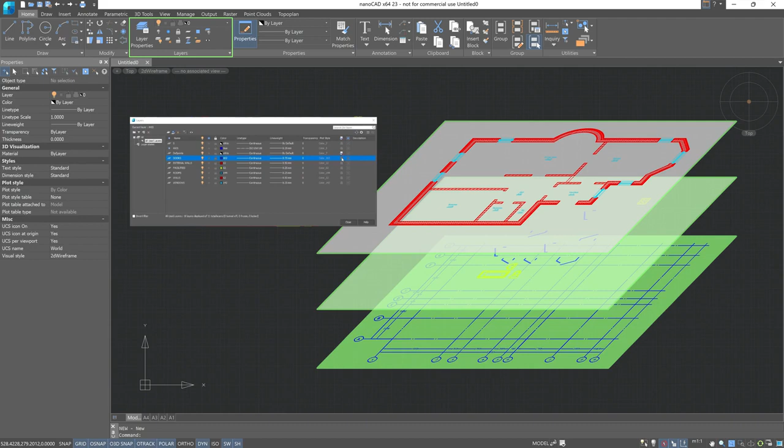Layers are intended for the logical grouping of data on a drawing, which can be displayed either separately or in combination with each other. A range of parameters can be assigned to a layer, for example, name, color, line type, weight of the lines, and so on. When selecting any element of a drawing that has a certain list of previously created layers, we can see in which layer the drawing was made, and its list of parameters.

The center lines are on the axis layer. A major advantage of working with layers is that if it's necessary to add a new axis to the volumetric plan of a typical floor, it's quite labor-intensive, and we can simplify this by hiding, for example, walls and partitions, then on the cleared drawing perform all the necessary work and afterward cancel the layer hiding command.

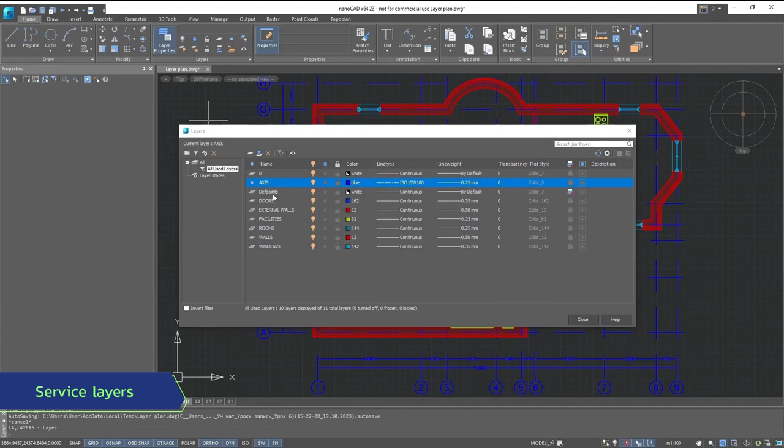Let's immediately note that layers 0 and Defpoints are service layers. These layers cannot be deleted, so they will always be displayed in the dialog box.

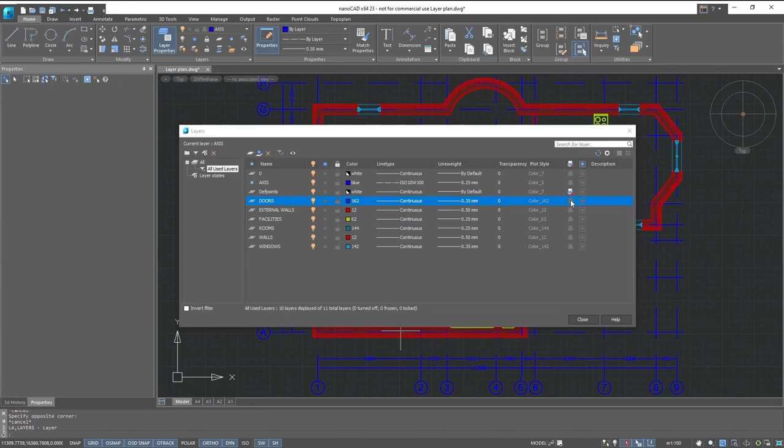All parameters of each layer are editable. We can rename the layers, turn the layer off and on, freeze, lock, change the color, line type, line weight, and also adjust transparency and decide whether this layer will be printable or not. Let's first look at all the tools that are in the layer group, without going into the layer state manager, and the first of them is turning off the layer.

This command offers to turn off the layer temporarily. Let's turn off the axis layer. We see that we've turned off this layer, and it temporarily disappeared. We can turn it back on and everything will return to its original look.

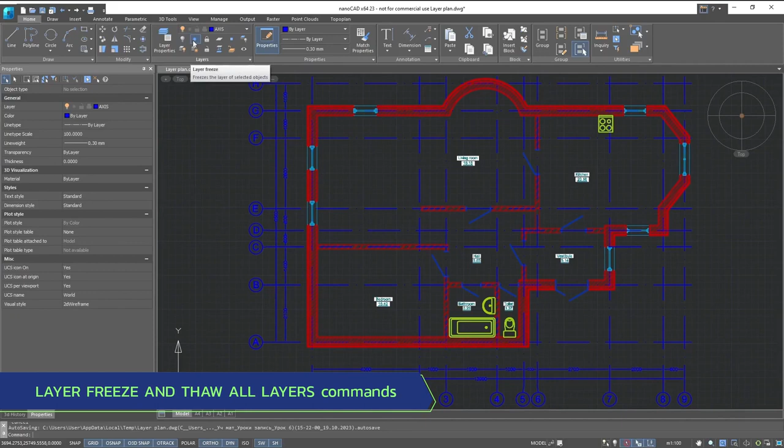The next command is freeze. This command allows you to freeze any other layers except the current one. They will stop being displayed on the drawing, but when selected they will be included in the selection area. Let's freeze the axis layer again. Under the freeze layers is a button to unfreeze the layers.

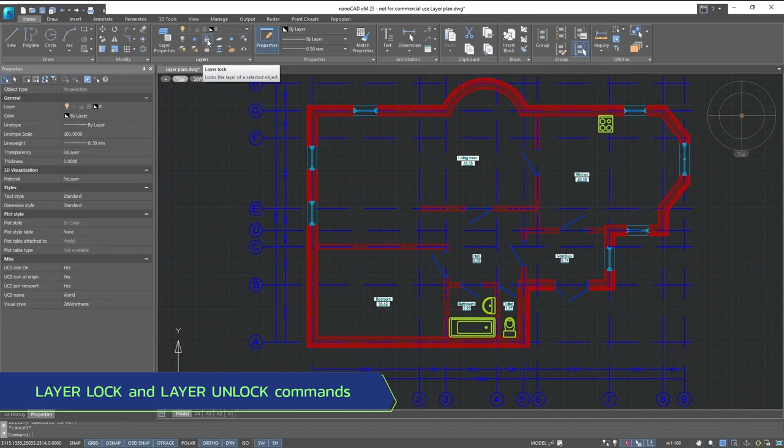Next is a layer lock command. When locked, the appearance of the object changes, but you cannot modify this object at all. For example, if there are objects that are strictly forbidden to move, such as walls or axial lines, they can be locked and they won't change their position. Lock the layer. Now we see that our axes are being selected, but we cannot perform any manipulations with them. Let's unlock this layer.

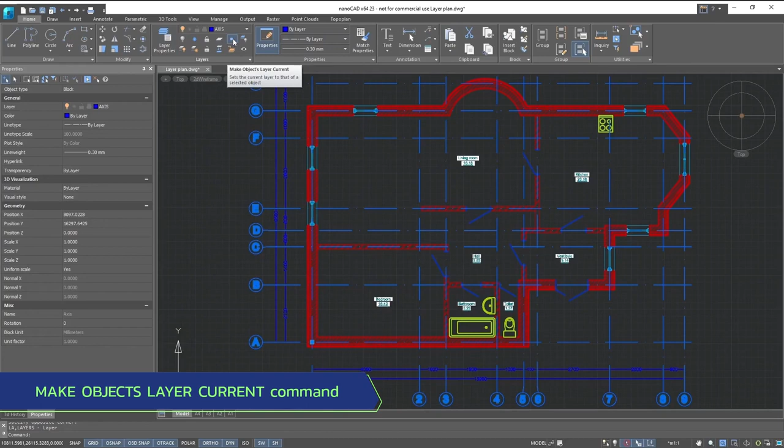The next button is for creating a layer. It is also present in the layer state manager. Later we will create a new layer. Make the layer of the object current. Now this layer axis will be the default unless we specify other parameters for it.

Next, turn on all layers that were turned off earlier. Unlock all layers. Layer matching command offers to transfer objects to another layer. You first need to select the necessary objects. Let's transfer the axis layer to the walls layer. For this, we select this command, pick the object we want to edit, and then choose the destination layer walls. In this way, we can transfer the properties from one layer to another.

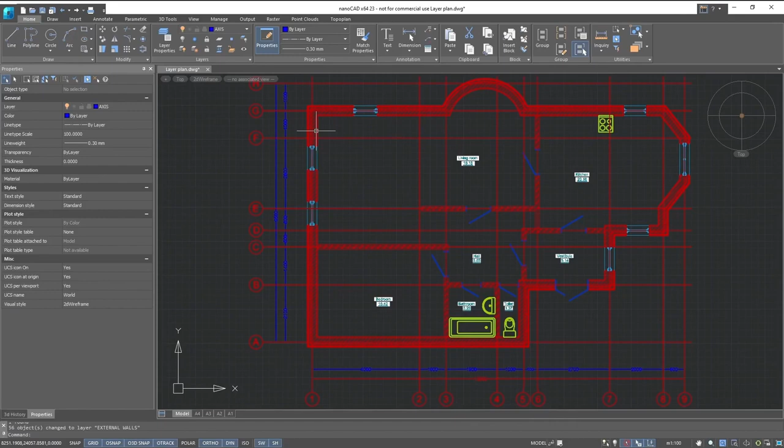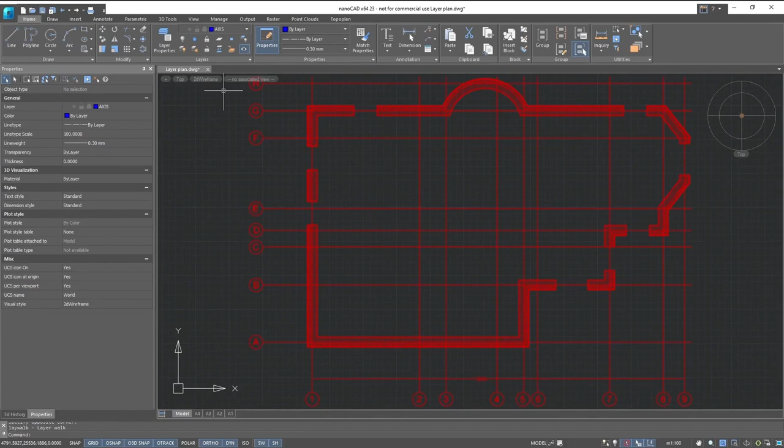The next command is previous state of layers. And the last is layer walk, which shows only the objects that were executed for layer bypass. Let's select axis again, layer walk. We see that the axes and walls remain because we transferred the axis properties to the walls layer, and all other layers stop displaying. Sequentially we can choose any layer and conduct various manipulations, and other respective drawing elements won't interfere.

Now let's move to the layer properties dialog box and figure out the next tools presented there. We can create a filter. The filter performs the following actions: it generates lists which, based on the selection criteria like color parameter or line type, should correspond to the layers that only have these parameters. Let's create a filter.

Let's name it New Filter. Now we can set the defining parameter that must be present in any of the layers. For instance, let's choose the red color. To do that, click in the area after the filter header and select red color.

Now let's finish creating the filter, and our walls layer got included in this list. To edit this filter, for instance, we want to replace red with blue. What's required for this? You need to right-click on the desired filter and click Edit Filter. Next, in the parameter selection dialog box, you need to choose the filter that sets the color, and change it to blue.

Then turn off the filter editing mode again. Now we see that instead of the red filter, we have the blue one, and all layers with this color are displayed. There is no need to create multiple filters. You can use just one, knowing that you can edit it and select the parameters you need.

The next tool is layer states. By states, we mean saving, restoring, and managing layer settings. All parameters will be automatically saved. Now let's arbitrarily set new parameters for the state.

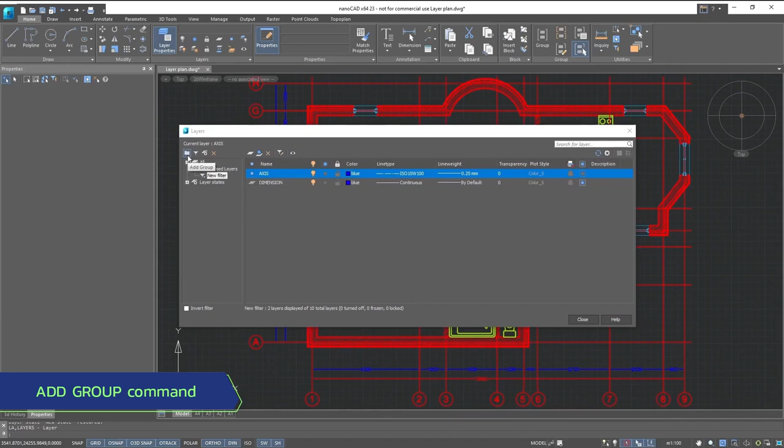Now let's try to create a layer group. This tool allows you to group layers together. For example, when you need to change settings for a large list of layers simultaneously. We'll name it Group.

In the next Group dialog window, we can add layers that we want to see only in this group, using the plus sign in the first column of parameters. Next, close the window. Afterward, in the same drop-down menu, we can automatically turn off all the layers that were added to our group.

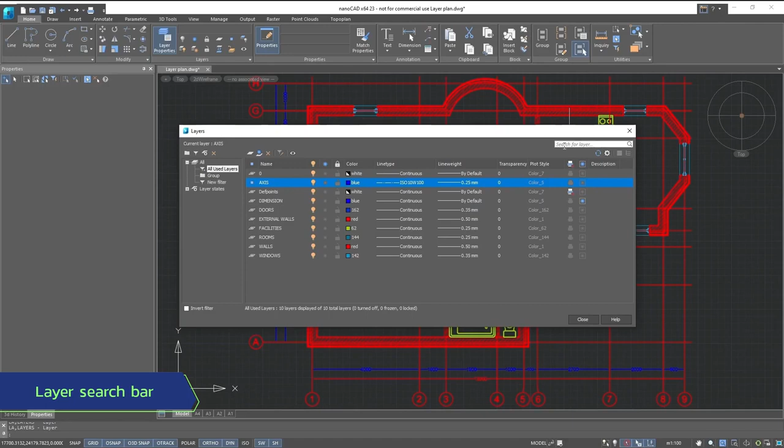We can also freeze them, lock them, and exclude them from printing. Another advantage of the following dialog window is that we can search for a specific layer using the layer search if you know its exact name, and find it from the entire list.

You've probably also noticed the tools located in the drop-down list. First is Layer State Manager, then Change to Current Layer. This command also allows you to transfer properties from one layer to another.

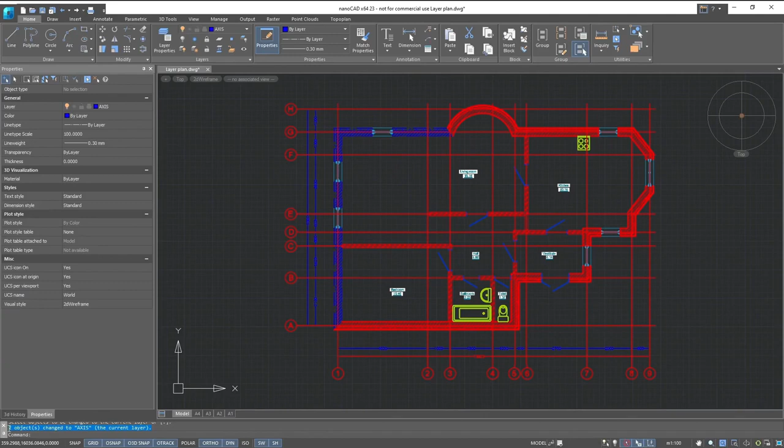Let's transfer properties from the wall layer to the axis layer. In the command line, you can also see the actions that were performed: 2 objects were transferred to the axis layer, and it's set as the current one.

Next, copy object to a new layer. We can copy objects. First, choose what we want to copy to another layer. Then we select the layer on which the objects will be copied. The next step is to specify the base point, and then we set the displacement.

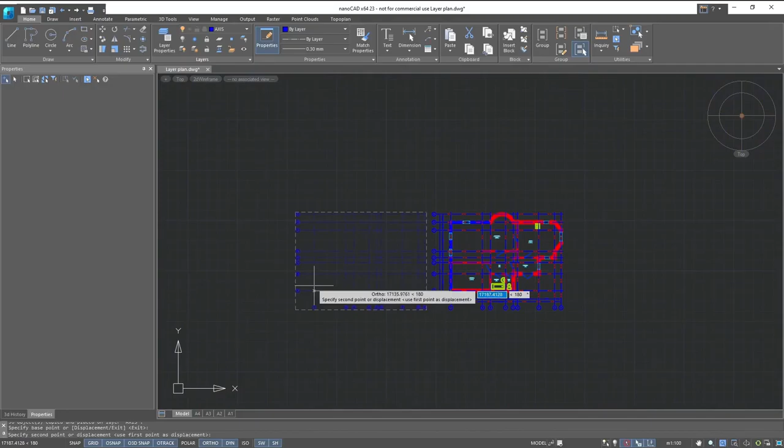Next, merge layers. This tool allows us to merge layers into one single layer. For this, let's select the doors layer and the wall layer. Choose the target layer, and the next dialog window warns us about merging the selected layers. Confirm. In this way, we have merged the doors and wall layers into one large layer.

We'll discuss how layers are displayed on the viewport a bit later when we study the section on sheets and printing.